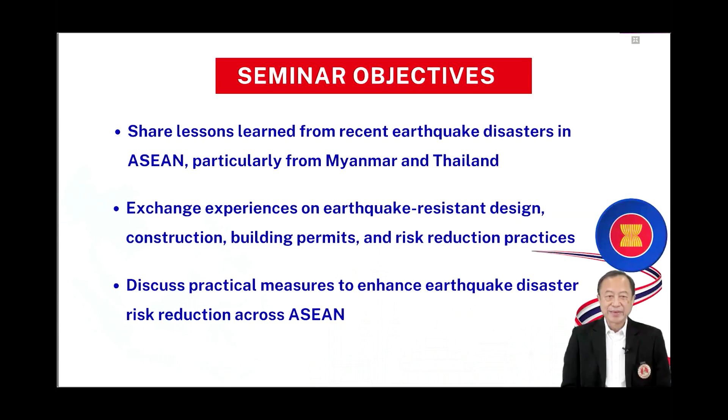Today we have the privilege of having the Deputy Governor of Bangkok Metropolitan share her experience on the recent earthquake disaster management. She was there from the first hour of the earthquake until the last day, and she saved a lot of lives. So thanks to the Deputy Governor of Bangkok Metropolitan.

Apart from that, we have the expert Dr. So from Myanmar to share experiences and information from Myanmar, and also two other experts from Indonesia to share their experiences in Indonesia. It's a pity that some experts from other countries like Japan could not come today.

And we also have one of the experts in Thailand to give us some facts about what happened in Bangkok in the past 3 months. So this is the objective of the forum today, and I hope that you who participate in this forum will benefit from the discussion, more or less.

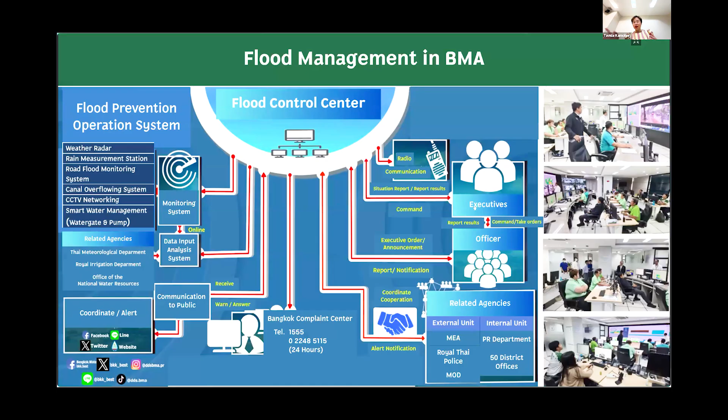I'm gonna keep talking. On that day, when we moved out of the building, this is what Bangkok actually did. We assembled our EOC and it's still going, it would be after the flood. Continue to the next slide. On that day when we heard the news of the building collapse, you have to...

This is what I don't know, what should I do in the next years to come or in the near future. I need to control a little bit more on social network, not to forbid them from posting anything, but I have to be the one sending out the news to compete with the news on social network. That's the other thing too.

When people don't trust, subconsciously you don't trust whether or not your building is strong enough, even if you already go down there and do stop, drop, take cover. Even if you know, as I studied from the professors, when the building shakes that much for that long, you can't do anything. People will run anyway. When people run, and the picture of these scenes is actually on the internet and social network, you can't help it. People are gonna actually move away from the building, even if the building has stopped. Even if the aftershocks that come afterward don't actually impact the shaking of the building, they're not gonna come back because of this picture.

No one is going to actually try to understand that Bangkok has about 6,000, 7,000, 10,000 buildings, and none of them collapsed, only one. No one is going to try to understand that we have about 210 construction sites, only one collapsed. Some of the cranes actually broke too, but that's fine. Anyway, I think we are somehow outrun by all the information that floods people, and that subconscious thinking of trusting the building or not.

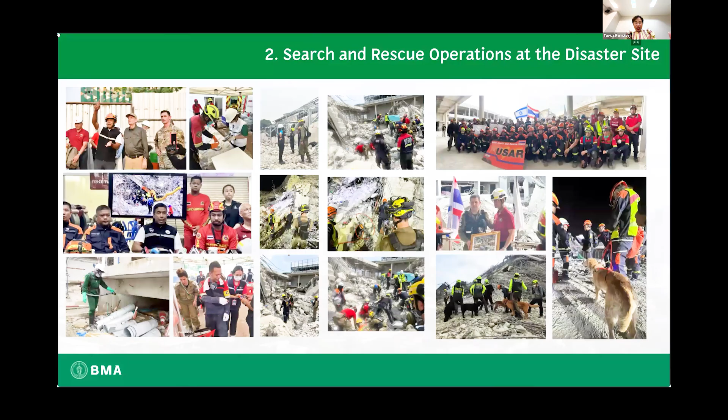We use this in a routine mode for public service and everyday problems. But this time we opened a new module, a building crack button. You can get in, take a picture of your room that has damage, or your building in your residential area, and send it to Fondue. We have volunteer engineers coming to our EOC to help look at the pictures to assess whether the damage is more or less, and communicate back to people whether their room is fine, their building is fine - a green tag.

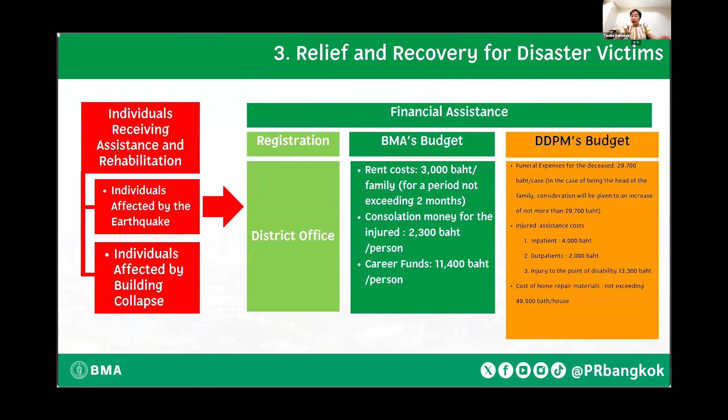Another number four regarding financial help — the other thing we ran into that is not quite easy at all is that the engineers might know best.

It's the compensation, the reimbursement that we're going to give to people. Right now, as I said, only through Fondue, 20,000 cases reported. But when we opened it as a district office to have an official report, 45,633 cases were reported.

Of these 45,000, most is usually minor and cosmetic damage. Nothing to worry about structural damage because the two buildings with structural damage have already been retrofitted and fixed. However, by law and regulations, we have to pay only for certain damage. Anything cosmetic, to make it a little more beautiful or go back to the previous condition, is not something the law allows us to pay for.

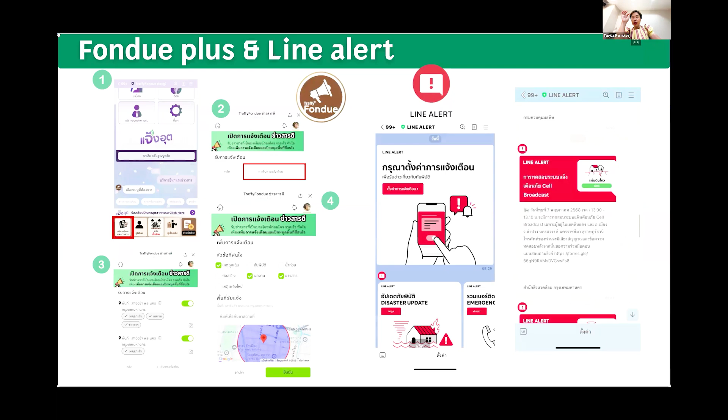On that day that I talked about the building, it would be the only building that I put a seismic monitor on. It's City Hall 2. We have 2 city halls in Bangkok. We put it there because our City Hall 2 has a height equal to 37 floors.

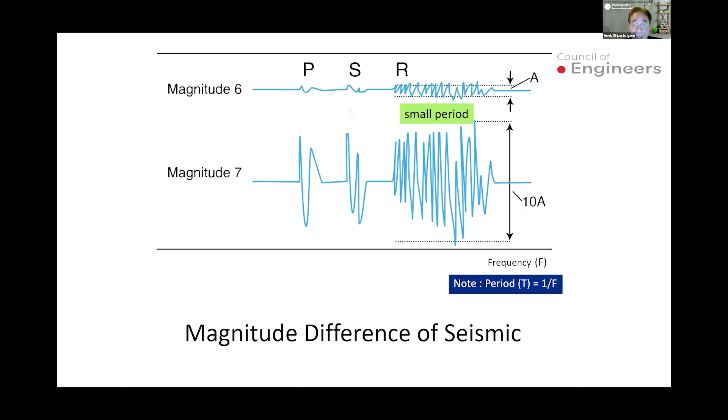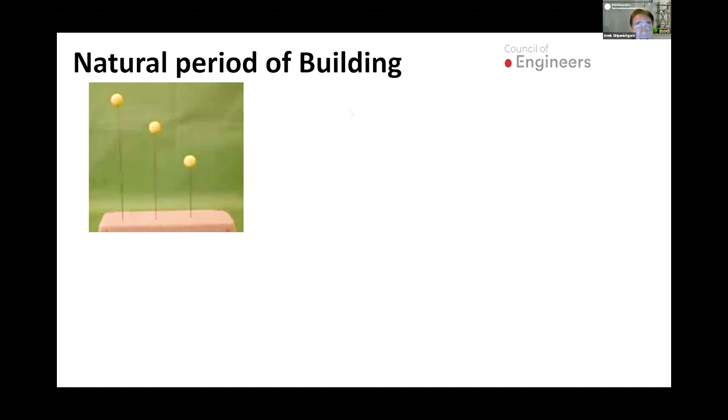As I said in the previous slide, near the active fault in the north part of Thailand, 2 or 3-story buildings may be affected by the earthquake. This is somewhat like resonance. If we look at small buildings, 1-story height, versus maybe 10-story height, the natural period is different, depending on the peak wave that occurs in the earthquake.

This is the earthquake report at Mexico City in 1985. The magnitude was 8.1, with the epicenter 350 kilometers from Mexico City. The damage report estimated 10,000 people killed, and property damage up to $5 billion. This was in 1985, and we studied it a lot, so in Bangkok we prepared the spectrum.

Now let me talk about our building regulation and standard. We began our regulation in 1997, when we had only 10 provinces or cities, starting from Kanchanaburi in the western part of Thailand up to the northern part. We got a new regulation in 2007, covering 22 provinces, and at that time we also had the standard, so we could design for earthquake resistance. This was the first one used in Thailand, estimated in 2009.

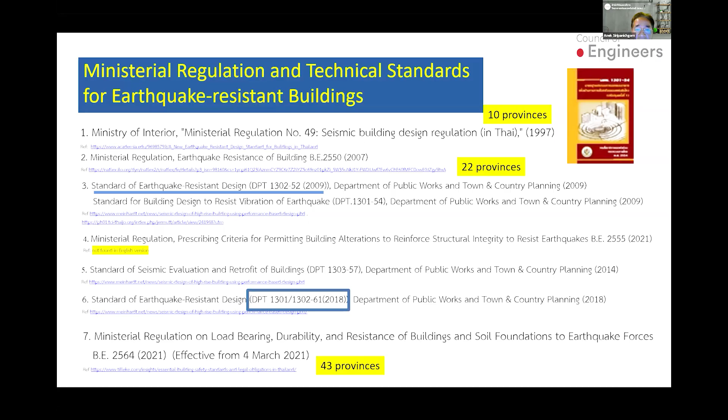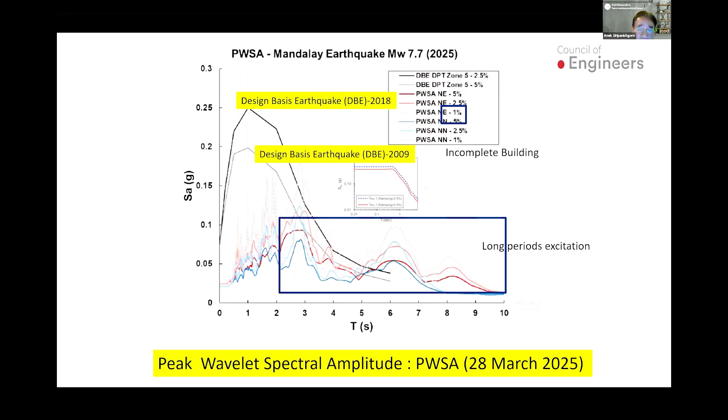After the investigation, when we submit the report, we will make a further study to improve our standard - the same as many countries, because the situation of excitation is very difficult and complicated. We accept that our spectrum acceleration provided in the standard may not be enough for long period excitation. This relates to the shape of buildings from low rise to medium to high rise.

I think this is a very key issue that we talk about. We can see the plan of the SAO building - this has a structural system with a core wall interfacing with the frame, and the floor is made by post-tension flat slab.

If you look for the center of rigidity, that means when we find the center of the stiffness of the building, it mostly depends on the core wall, compared to the center of mass, which is the center of the band. If these don't coincide, we will face a torsional effect.

Somehow, like this example, we can see different wall configurations in this span - in the western side we have a larger wall compared to the east, and the north is larger than the south.

So in this case, the center of rigidity and the center of mass do not coincide, so we will face a torsion effect. In the standard, this is called an irregularity. So the designer has to choose an alternative method - they cannot use the static one, they may have to use dynamic response. If the building is complete, we have to set up the CM and CR to coincide in the middle of the building - that's what we're talking about.

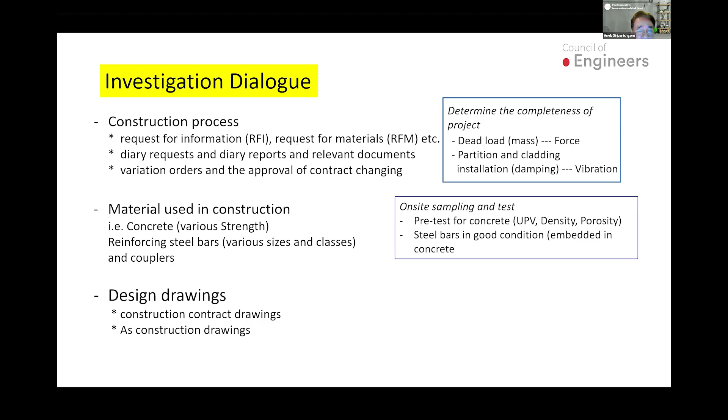Very importantly, we need to make sure the design of this building is okay or not. We divided into two groups - we have 6 universities in Thailand challenged to study this. We assigned 3 universities to run the construction contract drawing, using elastic and response spectrum analysis (RSA), which follows the 2009 standard.

The other 3 universities focused on the as-built construction drawing, considering that the thickness of the core wall was reduced from 30 to 25 centimeters, incomplete walls, and building cladding. This one was checked using nonlinear and modified response spectrum analysis, following the 2018 standard. So we ran our investigation through this dialogue.

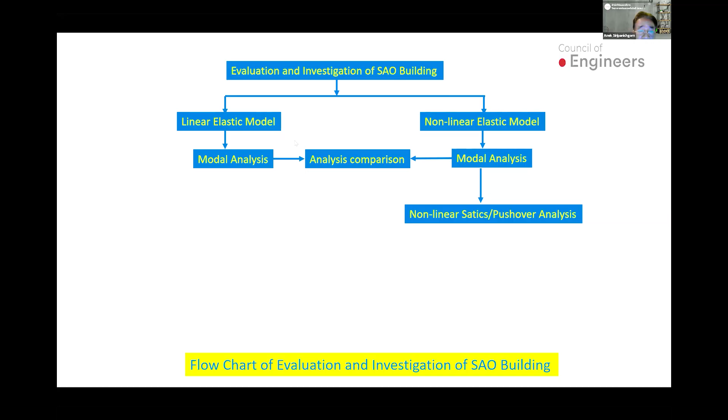So to conclude, our flowchart for evaluation and investigation of the SAO building consists of 3 universities running a linear elastic model, and the other 3 running a nonlinear elastic model. We check the modal analysis and compare results. Nonlinear is very complicated - I've told you that practicing professional structural engineers in Thailand rarely use nonlinear elastic analysis because it's very complicated. Now we have to check what happened to the building, so we're going to run through nonlinear static pushover analysis, which I'll detail after this. The modal analysis will analyze the model under real loads to find the natural period of the building.

For the nonlinear dynamic analysis, we use the time history, and when we check with the PWSA station, I showed you that this one will have the real PWSA data on the date of the incident. After that, we have to compare the analysis and the result of the SAO building. We have finished our investigation already.

For the nonlinear analysis, there are general steps involved in analyzing the building: project definition and data collection. We have the building geometry from the construction drawing and as-built drawing that we obtained from the office of construction. We also have the material property.

But in nonlinear analysis, we have to check the material property because it doesn't behave in the elastic behavior. We may be looking beyond the elastic range, so we have to check this in the model, and we use the properties specified for PWSA in the real case.

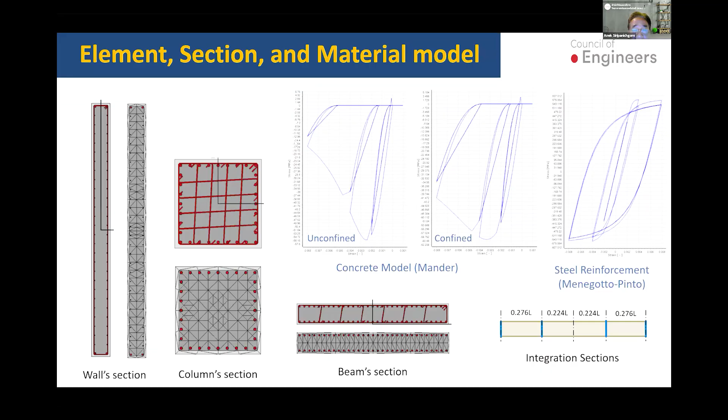This is the element, section, and material model. We use two researchers, very famous ones: Mander for the concrete construction and Menegotto-Pinto for the steel reinforcement. This is not the elastic model, because I think we get the true result when we come up with the nonlinear analysis.

For the structural model, we have 6 universities, so they use their own programs - sometimes like ETABS, SAP, SeismoStruct. We let them use their own software because we have to cross-check it.

For element modeling, we often model the beam and the column, which I'll show you after this slide. It's somewhat equivalent because we use the fiber method to check the shear wall.

This is very important because we can see that the collapse was somewhat like a pancake, a vertical collapse. It may have been caused by the shear wall collapse.

The mass and stiffness distribution is very, very important because we have a lot of mode shapes. We have to check what mode influences the behavior of this building's model, so the mass interpretation will be checked to show what is the most important mode shape.

Damping - I mentioned that 1% damping is also considered. And the loading, we have to use the gravity load, which is given by law and by the standard of our building code in Thailand.

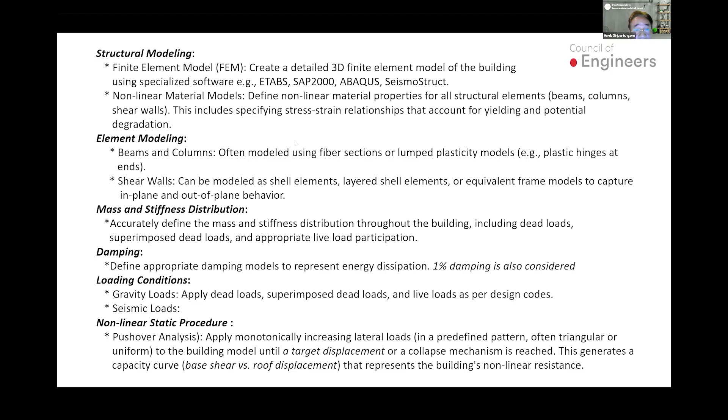So for the seismic load, we use the real data from 28 March. This is the building model.

I received this information from Professor Sutat. He is the leader of the University of Technology Thonburi team, and this is the parameter of the material that they used.

This is a discontinuity, and when we model it, we have to model it somewhat like an equivalent beam. We check it out like a rigid diaphragm for the frame, and the diaphragm is a horizontal subsystem. You can see there is a lot of core structure in this building.

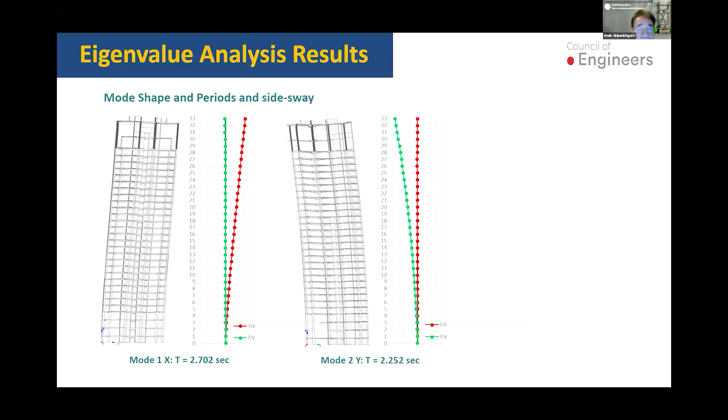This is the eigenvalue analysis we checked - first mode, second mode, and third mode. The first mode is sway and twist.

The second mode is only sway, and the third mode is twist only. This was checked from the eigenvalue analysis.

We compare the pushover results with the mode shape from the eigenvalue analysis. This comparison confirms what the major mode is that influences the behavior of the building.

You can see in the left table, this is mode 1, mode 2, and mode 3, up to mode 5 and 6. In the middle table is the effective modal mass percentage - you can see the modal mass percentage is very much concentrated in mode 1.

So this is the reason we consider very carefully the mode shape for the first mode shape, and this result helps us confirm and show what happened to this building.

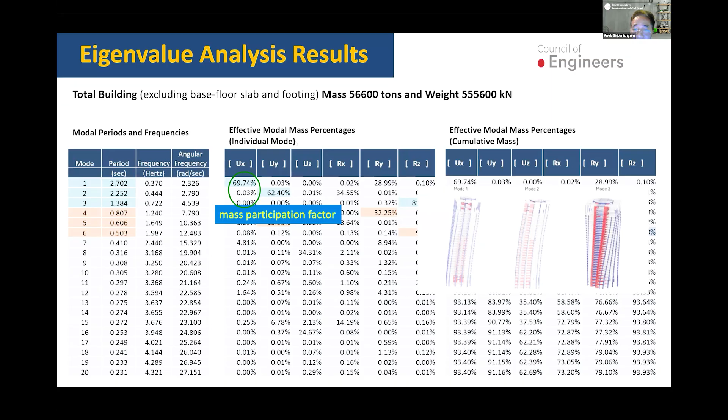So this is the mass participation factor that we use. As I mentioned, the first mode is sway and twist, the second mode is sway only, and the third mode is twisting under torsion.

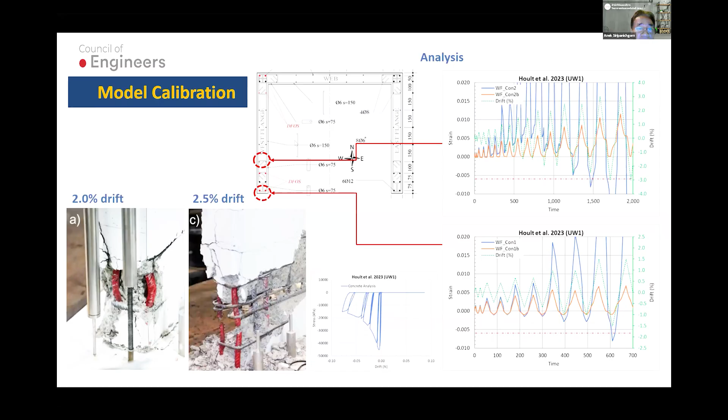So after we calibrate our model, we're going to run for the result. You can see from the figure of the building, the 3 columns. Maybe this diagram is from the first floor to 4th floor. So these 3 heights of the column are very slender. We should make our investigation into what happened first. Somehow this slender column maybe buckled before the total collapse of the building.

So we have to check with the recent research, we have to check the strain of the reinforcement that we use from our model results. For the performance, we check the displacement, we check the plastic hinge formation, and the very important one is we check the demand per capacity ratio that should not be greater than 1. And the base shear and overturning moment we check on every parameter to ensure our model is suitable to investigate.

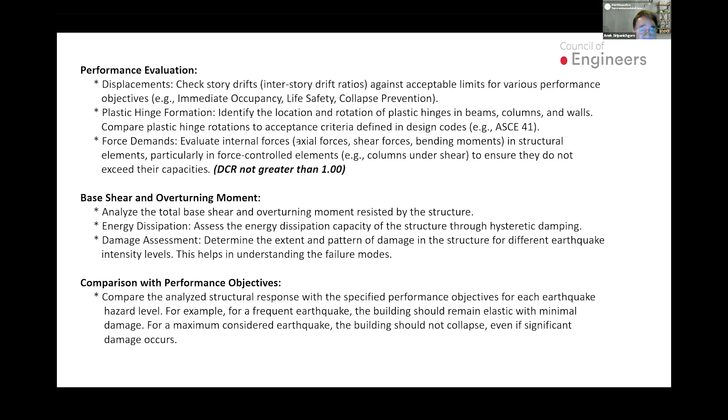This is a comparison of the performance objective. We put the nonlinear static pushover analysis, from north-south and east-west in the vertical and horizontal respectively. The model uses the load, and we target the maximum target displacement at 1 meter on the top of the building.

We check the strain, we check the force, every type of force somehow like bending, where bending will induce vertical compression and tension in the core wall, and we check for the shear. But it's very difficult because maybe on the program, somehow like ETABS, the model is unable to simulate shear deformation, right? They're looking for bending. Maybe bending is a measure for that computer model.

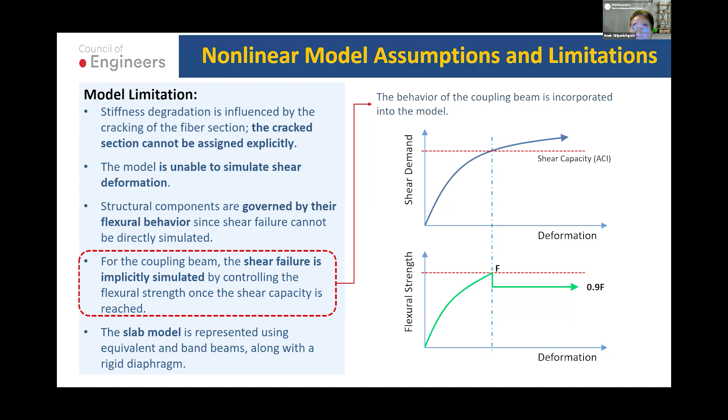We can see that from the NSPA, we got the roof displacement approximately 23 centimeters, and we get this into our calculation after that.

This is the pushover result in the east-west direction. We have seen some defects that occur maybe in each core wall. We have a lot of core walls, and after that we're going to push it, somehow like you can see from the graph that we're looking for the yield, the wall yield, or the beam shear, or the wall crush, or the yielding of the reinforcement. So we put this one, the target is 1 meter.

And this shows the wall shear DC ratio, DCR, right? 23 centimeter displacement in the south-north direction, and laterally on the plan of the building. So we can detect some DCR greater than 1, approximately at floor 3 or 4 somehow.

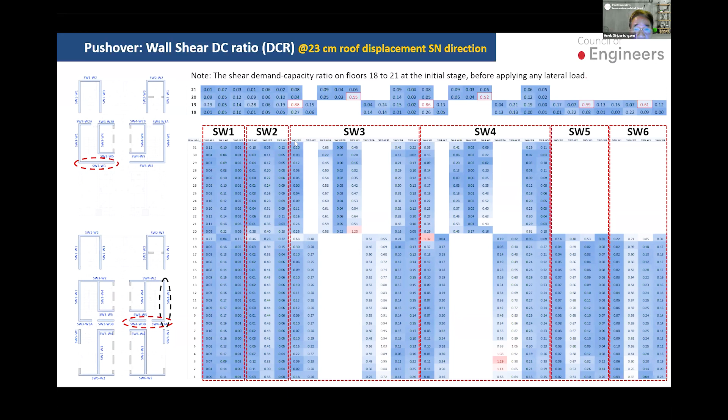Then we can find the DCR that's greater than 1, and we also check the strain, right? The strain will occur especially in concrete. The magic number is 0.003, greater than that we will find the crushing of the concrete. So the wall strain, especially in the core, we have to check it.

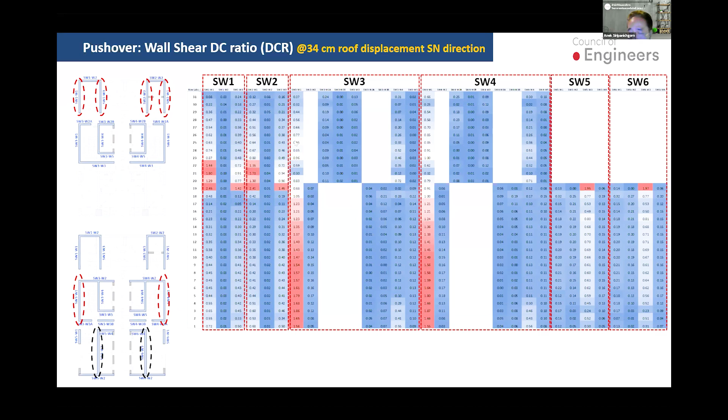And this is from the landing of the NSPA. So we try to push more than that, at 34 centimeters roof displacement. You can see that we have a lot of DCR greater than 1, and this shows the weaker point, the weaker floor that begins the total collapse. We also check the strain in the reinforcing bar, right? Some strain is greater than yield strain, and we also check this at the ground to the second floor. This is the result we get from the investigation.

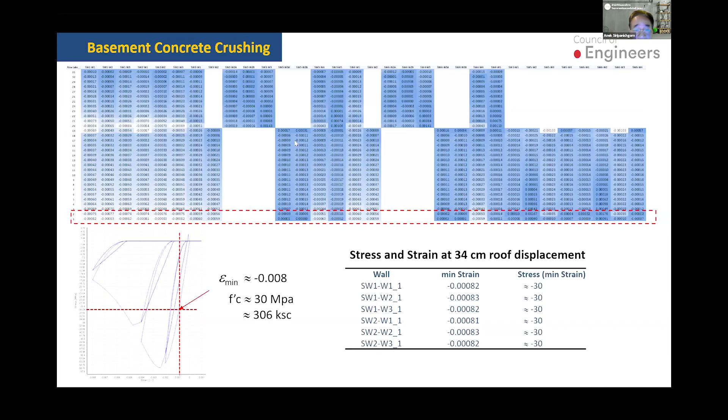So the magic number, you can see that the strain minimum is 0.008, right? This is maybe for the f'c about 30 megapascal. So this is the one we have to look after, because we expect that the failure is coming from the crushing of the concrete in the wall, and we will review many research papers to see what is the basement concrete crushing or not.

But we found in our investigation that it's not coming from the footing or the piling of the building. And this is the one we use to explain the difference in strain we're looking for. This is a ratio of shear force to shear strength of the RC wall.

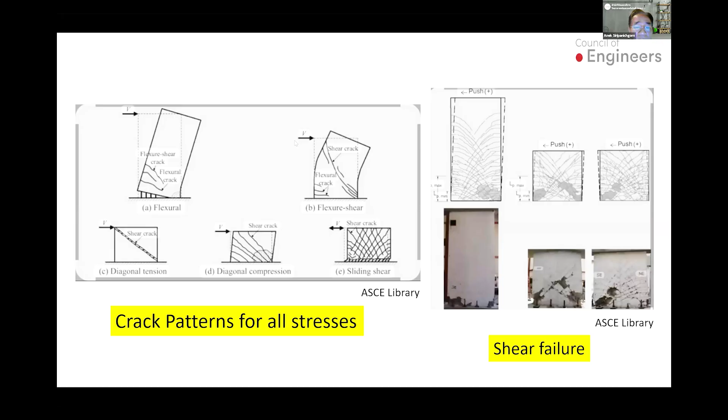However, when looking at the forensic engineering, we have to look for the evidence that occurred on that day. We have the preliminary data from the video recordings. We have 10 clips from different sources. This is very important, because we have to check from the 10 clips.

We have to determine what is the trigger and where the trigger occurs in our collapse timeline. So the video clips will be manually synchronized by visual cue, and the result will show the incident timeline.

You can see that we have 10 clips, renamed 001 to 010. The frame rate is 30 frames per second, so our investigating committee is looking very carefully at each second. We have 30 frames, very small intervals, because this is very important.

And the frames, we can see we have 10 videos of the building. This comes from people who took the video recording themselves. We have 10 clips, so our duty was to synchronize them to the same time.

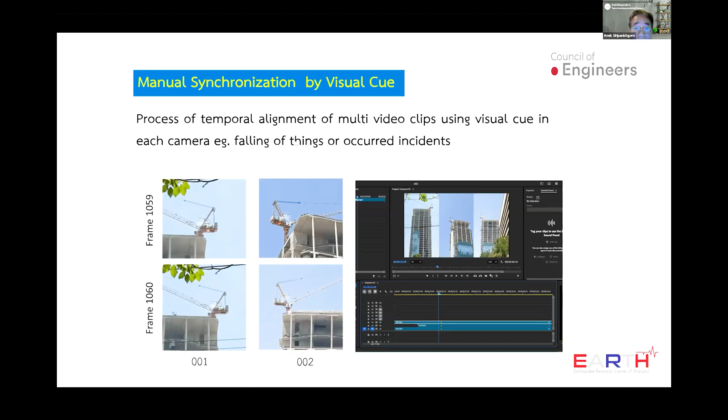So first we checked camera number 1 against another one, and we can check everything. The checking is something like watching the video to see if at that time something was falling from the upper floor, something like cladding or the preventing plastic covering the building changing shape or deforming. So we can make the synchronization from this.

So the first step is synchronizing clips 1, 2, and 3, because the file names and the time they were taking the video are very close. After that we synchronize all 10 clips, so we can effectively have only one camera capturing the whole building.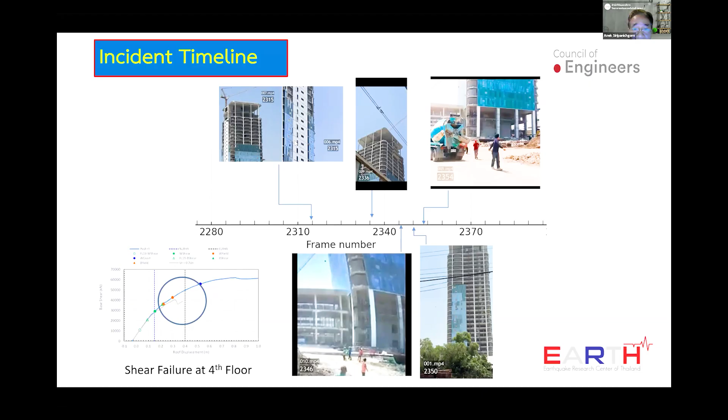So I think the ticker is on the 4th floor, and we checked the shear failure at the 4th floor is the same. When the failure occurred at that floor, at that core wall, it could not push over anymore, which ended up with a loop displacement, and we had a lot of consequent failures that occurred. This is the story from our investigation.

In the last part of my presentation, I think I have to show you our iconic building in Bangkok. This is the outrigger and belt truss system, which is very suitable for a large center core, and we have to reduce the sway of the building, especially from wind action.

So the way to reduce the sway of the building is to put a cap truss or ticker members, fixed and assembled with the auxiliary columns. If you have wind load from the left, the auxiliary columns will create a couple that induces compression and tension. This couple helps to reduce the sway of the building.

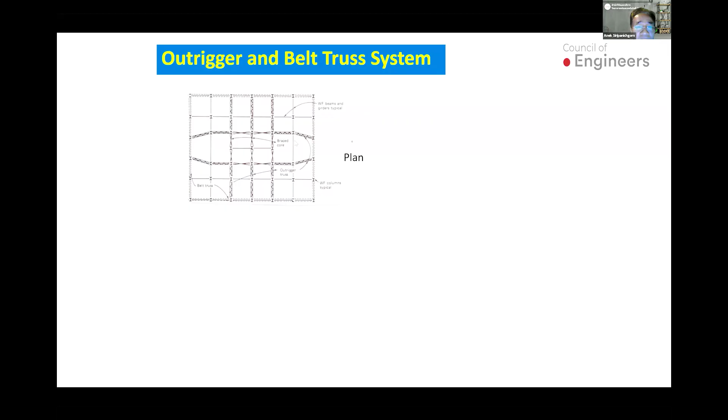And this is the behavior of the outrigger belt truss. This is our building. We have 2 buildings in Bangkok, and the outrigger should communicate with the belt truss to ensure that all the exterior or perimeter columns act like the ones we take from the central core. This shows the structural system of outriggers and belt truss.

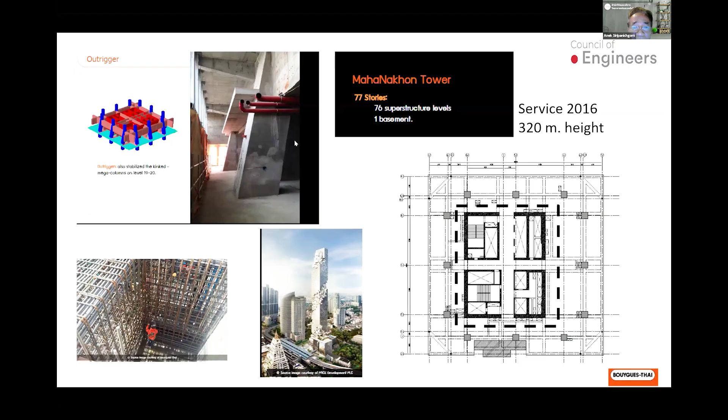In Bangkok we have a modern tower called Mahanakhon Tower, approximately 320 meters height, serviced in 2016. This building is 77 stories height. They have a large core wall, so it behaves somehow like a bending mode, and there are no columns within the core wall and the perimeter column, so they try to use outrigger and belt truss. However, this one is made from reinforced concrete, so the beam is very deep with very much capacity, a very thick RC, and they use the RC wall to be a belt truss.

The last structural system I show you is the tube structure. This is how to make a structure give the largest moment of inertia. They form the structure with closely spaced columns connected with deep spandrel beams, so this one is somehow like making a tube structure.

We know that the Empire State Building in 1931 is very famous, maybe the most famous tall building in the world. They use frame and wall, somehow like a shear wall, working like a frame, like column, slab, and core wall.

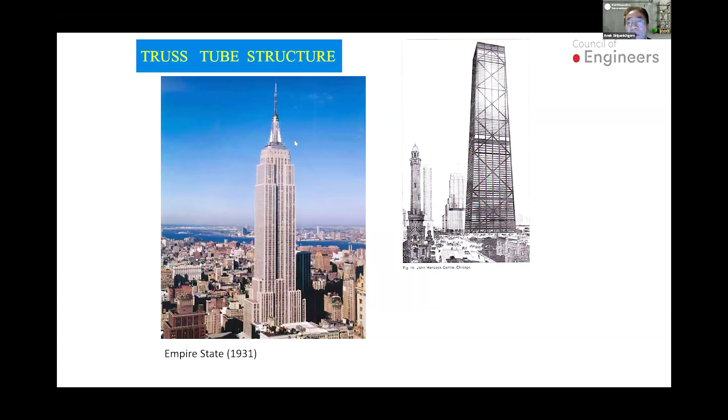Another very famous building is the John Hancock building in Chicago, serviced approximately in 1976. They use the tube also, but the column spacing is not closely spaced. They use wide spacing of columns, so they have to put the truss tube. This shows that the structural system of the building can reduce the price of the building compared to Empire State. They use maybe only 55 or 60% of the steel that was used in Empire State.

We have one like this in Bangkok, called the Baiyoke Tower. It was maybe the highest building at that time, serviced in 1997, 304 meters. You can see from the section of this tower the diagonal truss tube. So this makes an inner tube and truss tube.

So this one is very strong, and this is the answer to why our tall buildings can be very strong compared to the previous seismic events in this time. Maybe I come to the end of my presentation, and I have to say thank you for your kind attention.

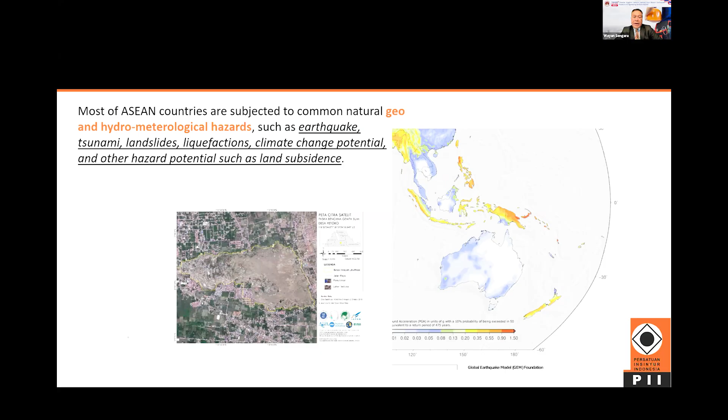In ASEAN, we are on a similar or the same tectonic setting, where most of our ASEAN countries are subject to this subduction source. Many ASEAN countries, particularly Indonesia, Thailand, Myanmar, and some other parts, are affected by this seismic source. As you can see here, I don't want to scare you.

Indonesia has experienced many earthquake disasters over the last 30 years, and many highlighted in orange are the large ones with magnitude higher than 8. It also caused collateral tsunamis, and the last one, the Palu earthquake in 2018, caused liquefaction - maybe the largest liquefaction occurrence this century. And of course, in 2004 we had a very large 9.2 earthquake.

This is typical damage or collapse of many buildings in Indonesia. Even though some buildings remain intact under the earthquake, many of our buildings have experienced various levels of damage.

What is our framework for disaster risk reduction in the future? We have an ASEAN vision for disaster risk reduction 2025 that identifies some perceived items, like building capacity, regulatory arrangements, and preparedness strategies that we need to implement in the future. We also need to enhance disaster management and emergency response due to this hazard.

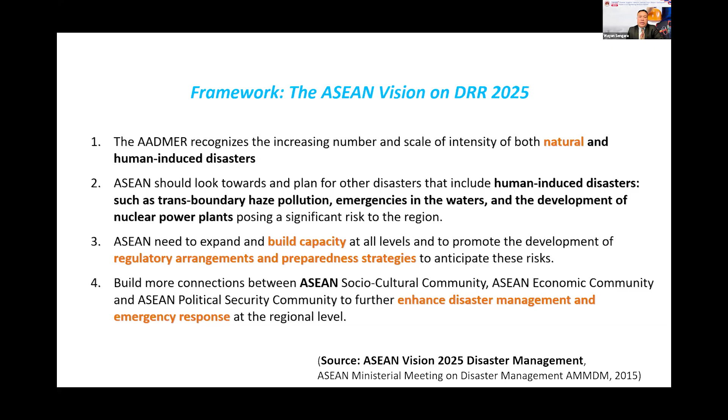Indonesia's state of progress in earthquake disaster risk reduction includes the master plan for disaster management from 2020 to 2045, our presidential decree from 2020, managed by our emergency response agency. The second is the 2017 and 2024 update of Indonesian earthquake source and hazard maps. Also in 2019, we have a new revision of the Indonesian seismic resistant structure code for buildings and non-buildings, updating the 2012 version.

This process followed the 2004 Aceh earthquake, after which we committed to revise and update our seismic hazard map and building codes. One response to this is the seismic hazard and risk targeted ground motion effort - we wanted to update our code to follow or refer to international building codes, particularly ASCE, the American Society of Civil Engineers. For this, we referred to ASCE 7-2016.

This resulted in the 2019 risk targeted ground motion map, an important input to the building codes and to compliance enforcement of the building code process and capacity. I'd like to share this as our framework - the part highlighted in red relates to us as engineers, as professional engineers, needing to be aware that the seismic building code, its dissemination and training, building design, building code compliance for permits and construction supervision, is a key element to reduce earthquake disaster.

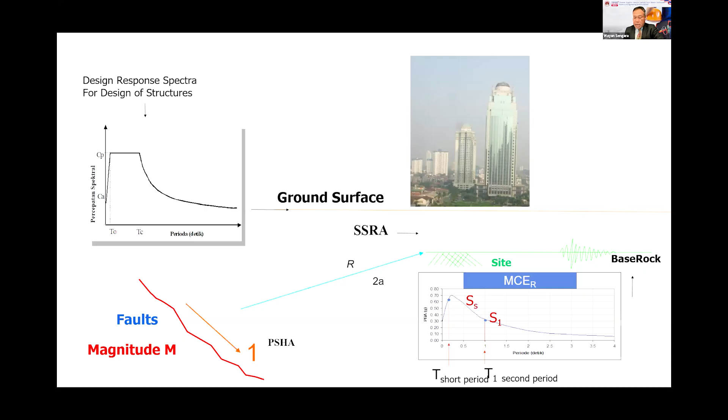So we need to specify what is, let's say, the PGA, what is the spectral acceleration at the base rock, and then we have a site classification to be properly classified, so that our spectra for each specific site is identified properly. So this is the process.

This is the evolution of our seismic building codes from 1978, then 1992, and then also to 2017. So from 1978 to 2017 we have a relatively significant update on this.

And this is the update of the Indonesian hazard map, and actually in 2024 we also have the new map which is not currently included or input into the new building code, but we have the hazard map already. And this hazard map is not only for building but also for bridge structure and also dam structure.

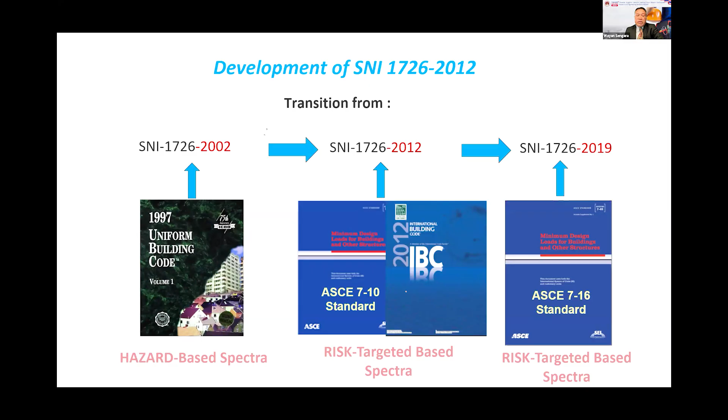So the development of the Indonesian seismic building code is actually referring to, in 2002 we have UBC, and then 2012 we use ASCE 7-10, and then finally for 2019 we refer to the ASCE 7-16 standard, which actually become the international building codes.

In addition to this, we release a new Indonesian seismic building code, and also the requirement on the earthquake ground motion selection and modification for building.

So just now we heard Professor Anek present how we do a nonlinear response history analysis for important buildings, a high-rise building, and this is also in practice currently in Indonesia. I think later on Professor Iswandi, Imran, will go into more detail on this, but the ground motion guideline is already available and now is adopted for practice in Indonesia.

How about the compliance and enforcement of building? We have an advisory committee establishment and review process, currently modified as a professional engineering expert to review the design. And this is by the decree of the local government to have the building permit properly evaluated.

So just to highlight how the professional engineer need to have a certificate and well, actually need to have a license to design, and the advisory team or the expert need to evaluate for the permit. This is the engineering capacity building.

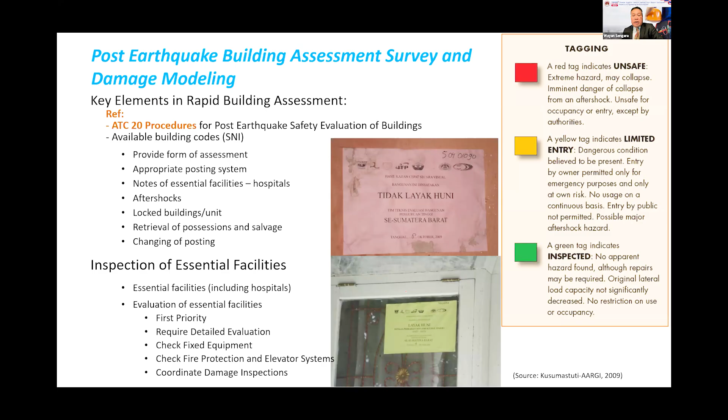So in this we have this experience. Many of the post-earthquake buildings we tag red, yellow, and green. During the 2009 West Sumatra earthquake, we had a more systematic post-earthquake survey in more detail compared to the rapid building assessment, with a total of almost 4,000 buildings surveyed in this area.

It comprised many building construction types, medical facilities, educational buildings, commercial, and residential structures with various types and construction. The survey work entailed 1,700 interviews with residents, and buildings of all ages were damaged, with nominally engineered structures also suffering significant damage. The observation revealed that poor structural configuration, poor detailing of reinforcement, and use of low quality construction material were some of the contributors to this damage.

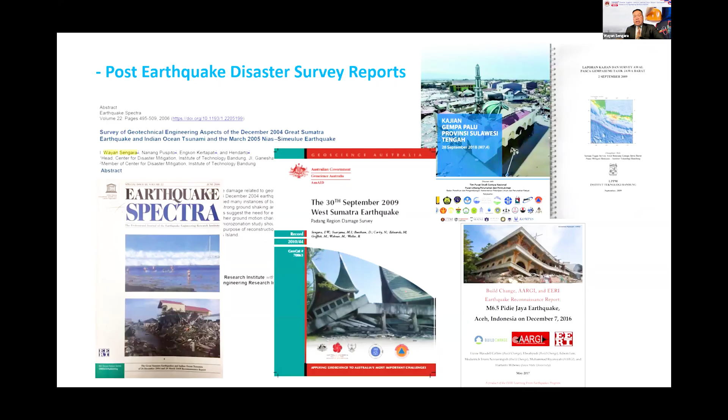School safety - this is my last thing to share - includes training, and also training for masons. Our schools need to be protected to make sure that our children, our future generation, are safe under earthquake in the future. We have conducted this in several provinces in Indonesia, even though this activity is not too aggressive.

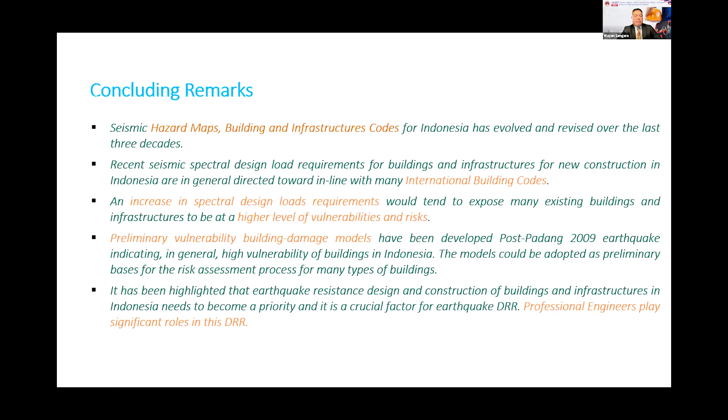So now we identify the risk of building damage, and this is good for disaster management agencies, and also important for insurance to identify the risk. So it has been highlighted that earthquake-resistant design and construction of buildings and infrastructure in Indonesia needs to become a priority, and this is a crucial factor for earthquake DRR. Professional engineers play significant roles in this DRR, and it is essential to prevent and minimize building and infrastructure collapse or damage from future earthquakes.

Through all of this, I think I already mentioned the provision of full engineering design parameters - this afternoon we also heard from the deputy governor that we as engineers have a lot of roles in this, and we need to put proper design parameters for our buildings.

So the improvement of building hazard and building code. We need to also legally put these building codes in the local regulation. Proper design, good quality construction, and also design enforcement for the building permit, systematic and good construction supervision.

The disaster management agency needs to have disaster risk assessment for the building and infrastructure. This demands development of continuous enhancement of building and infrastructure vulnerability models. Retrofit of school, essential and vulnerable buildings.

I think we learned a lot from Taiwan. Most of the school buildings in Taiwan have been retrofitted. So in Indonesia, we have a lot of concern on school buildings.

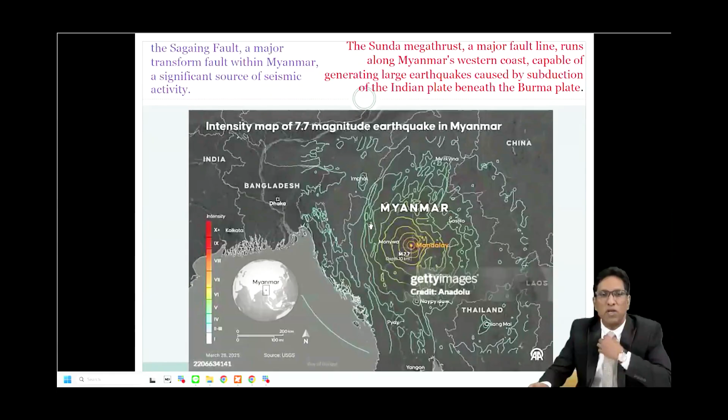So when we study Myanmar, this was the recent 7.7 earthquake, called Sagaing, affecting Yunnan, Thailand, Bangkok, and Ho Chi Minh City afterward. When we look at Myanmar, we have two major earthquake sources. One is the Sagaing Fault, running along the center of Myanmar. Another is the Sunda Megathrust, along the west coast, which is also very severe. When it happens, it's around magnitude 7.7, 7.8. So Myanmar has two very serious earthquake sources.

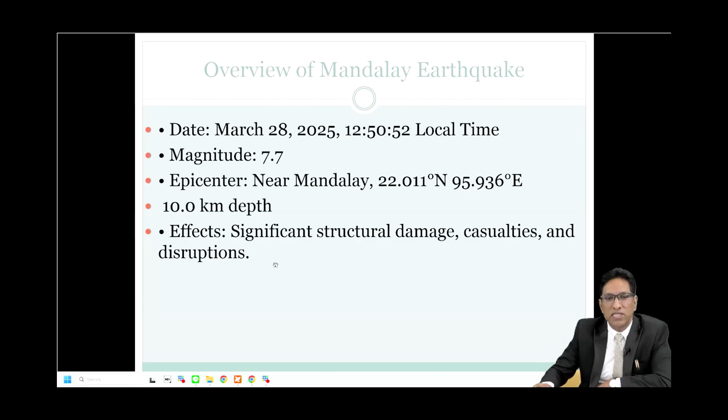So let's overview the Myanmar earthquake on March 28, 2025. Magnitude was 7.7, epicenter near Mandalay, to the northeast, with a depth of 10 kilometers. The effect was significant structural damage, casualties, and disruption. Looking at the moment magnitude, the seismic movement corresponds to a 7.7 magnitude earthquake.

When we see the earthquake-related severe damage, we come to pay attention to detailing. Earthquake-related detailing refers to construction practices that improve seismic resilience. This is essential for our region, because such detailing can prevent catastrophic failure of buildings during an earthquake.

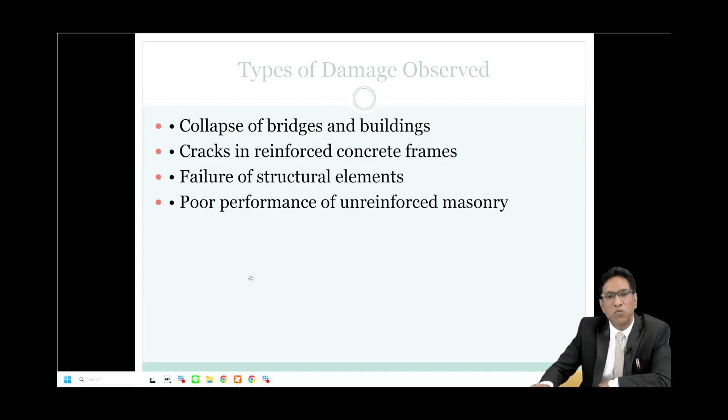So how severe is the lateral force of the earthquake? We can see it was very severe when the earthquake hit. To cope with this lateral force, we need very precise earthquake detailing in construction. The root causes of the damage are inadequate detailing in construction, lack of ductile reinforcement, poor quality control, ignoring code provisions, and informal construction practices. These five items, in my view, are the root causes of the damage during the Mandalay earthquake.

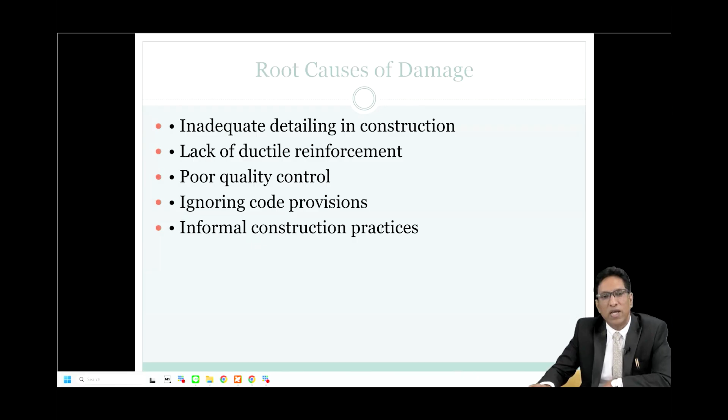Looking at some pictures, we can see why this happened - column shear failure. Improper confinement of longitudinal bars led to shear failure of columns during the earthquake. We need very good confinement in the detailing so that we can prevent this kind of damage.

Second is the open ground story problem. The upper stories have brick walls and are stiffer, but the ground floor is less stiff, so the column fails because of poor energy dissipation capacity.

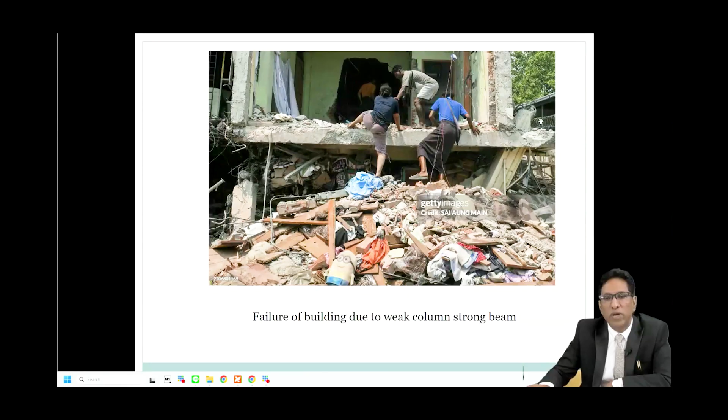Another case we studied shows weak column, strong beam - the beam is still okay, but the column has already failed. In my opinion, this is because of the captive effect due to architectural requirements, causing the column to be unable to withstand the force. In the steel frame case, it's because lateral force causes warping torsion, so we need good stiffeners in the steel structure.

Coming back to what earthquake-related detailing means: we need to consider ductile design, proper stirrup spacing, beam-column joint reinforcement, confinement reinforcement in columns, ensuring energy dissipation during a quake, and the captive effect due to architectural requirements. All these six items have to be considered for the ductility of the structure.

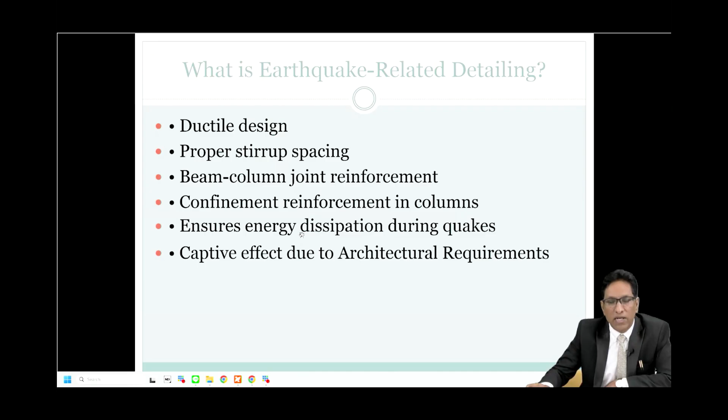When we look at lateral force versus gravity: under gravity, our beam behaves with positive and negative moments like this. Once seismic lateral force comes in, the behavior changes, shifting right side and left side. When we see the resulting moment, it becomes like this, so we need to treat the end conditions. The end condition has to have very good ductility to withstand the seismic force.

When we look at the column, as lateral force comes in, the moment behavior is like this, so the splice region is located somewhere here. This area becomes the plastic hinge area, so there is no splice in this area.

Okay, we go to study all the detailing of the reinforced concrete. This all is from our teacher.

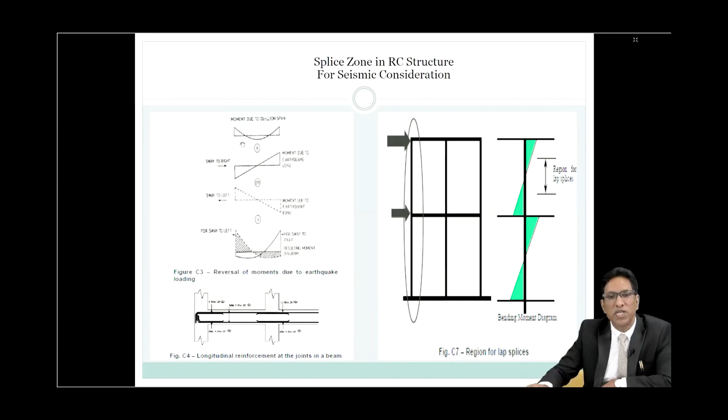So when we study the ordinary moment resistant frame, this is for gravity. There is no plastic hinge, so we can have the lap splices not in this region, not in this region, not in this region. This is the concept of the ordinary moment resistant frame. So if you want to lap splice, it must be outside this area. If you want to lap splice in the center, at positive moment, you cannot do the lap splices there.

So for the beam, the same concept applies as well. For the column, the lap splices you can do after the slab. After the slab, you can do the lap splices in that region.

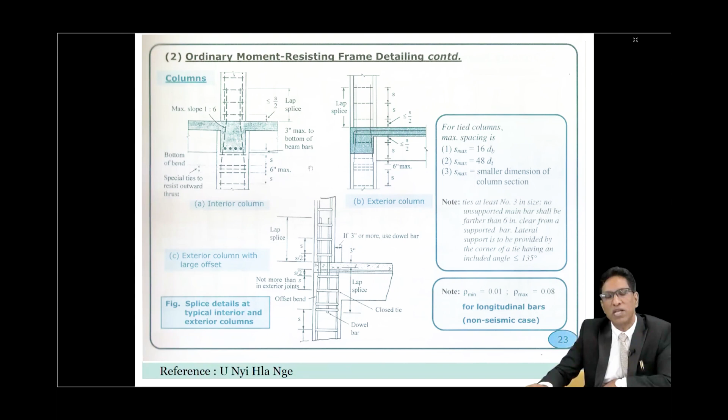And then the stirrup spacing also, according to the code requirement, is 16 diameter of bar or the smallest dimension of the column section, C1 or C2. So normally the smallest dimension governs. This is how to do the confinement for the column.

But for ordinary moment resistant frame, the hook is still 90 degrees. Then we go back to the intermediate moment resistant frame detailing.

So when intermediate comes in, the definition of the plastic hinge region comes into consideration. The code defines a 2H area, where 2H is the plastic hinge area. In this plastic hinge area, there can be no lap splices.

And then the spacing of the stirrup. The stirrup spacing is 8 times the smallest bar diameter, divided by 4, or 12 inches for the intermediate.

When we look at the column for the intermediate frame, there is also a plastic hinge area. This area is defined by the larger of C1, C2, or the clear height divided by 6, or 18 inches. In this area, no lap splices are allowed for the intermediate moment resistant frame, and the hook becomes the 135 degree seismic hook.

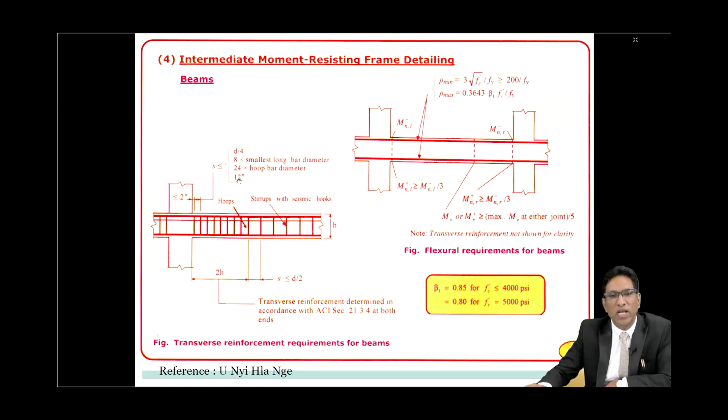So for the special moment resistant frame column, the plastic hinge area is the same — larger of C1 or C2, or clear height divided by 6, or 18 inches — but the spacing is different already. Spacing is C1 or C2 divided by 4, 0.25, a very small spacing we have to use for the special moment resistant frame. The stirrup spacing becomes lesser compared with the intermediate moment resistant frame.

It is 0.5 of C1, C2 for intermediate — C1 or C2 divided by 2 — but for special moment resistant frame, C1 or C2 divided by 4, 0.25, because it requires more confinement, more arrangement of confinement for the special moment resistant frame.

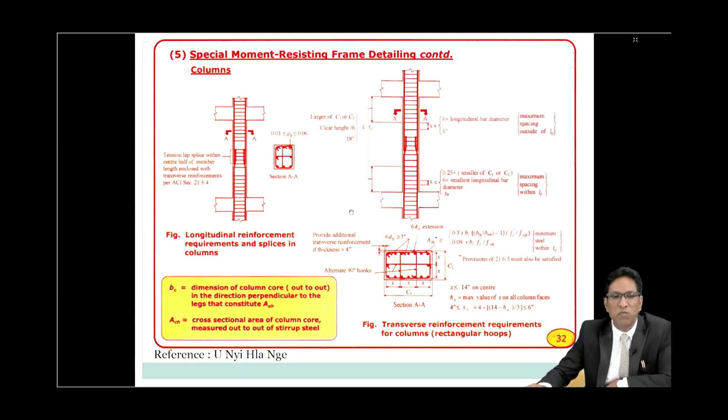For the RC structure, we advise following MNBC, ACI, and Eurocode. MNBC is Myanmar National Building Code. ACI and Eurocode standards cover proper anchorage and lap splices, as mentioned before, shear detailing and confinement detailing to improve ductility and resilience, and proper management for the captive effect.

If you follow all these things, I think you can resist the earthquake lateral force in some instances. So for RC structure ductile design, I recommend the IS 13920 code and commentary, because it comes from a World Bank project, and through experiments they defined things better.

In the IS code, the response reduction factor changes. In gravity design we use 3, but in ductile design we use 5. So increasing the response reduction factor helps minimize the risk of earthquake damage.

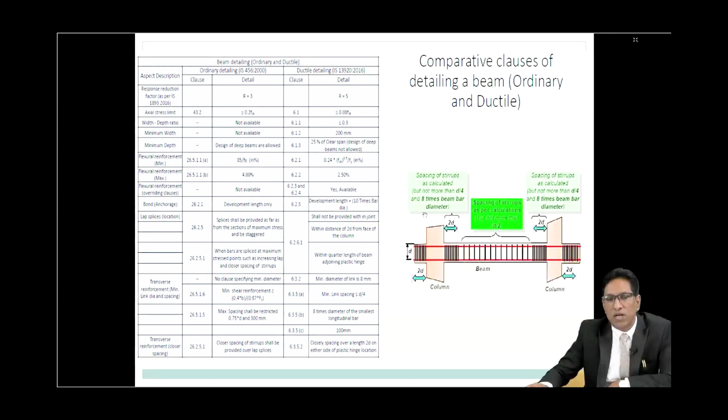Another interesting point is the minimum width. Ordinary design doesn't define it, but ductile design requires a minimum of 200 millimeters for the beam, and stirrup spacing as I mentioned already. So what we learn is that the minimum dimension of the element is defined. For the column, the response reduction factor is the same, but the minimum dimension becomes 300 millimeters. This is the ductile design requirement.

So we go to the next section. Up to now, what I presented is all about RC structure. Now we go to the steel structure. Once we talk about steel structure, we have to follow the AISC seismic provision.

When we talk about detailing of the steel structure, we cannot look only at connections. Connection is actually less important in the steel structure. More important are the material requirement, member and connection requirement, and structure requirement. All three together make the steel structure ductile.

When we talk about stability, we have 3 equilibriums: stable equilibrium, unstable equilibrium, and neutral equilibrium. When the load capacity reaches stiffness zero, it becomes neutral equilibrium. When stiffness goes negative, it becomes unstable equilibrium and structural stability failure. To protect against this, we need ductile design of the steel structure.

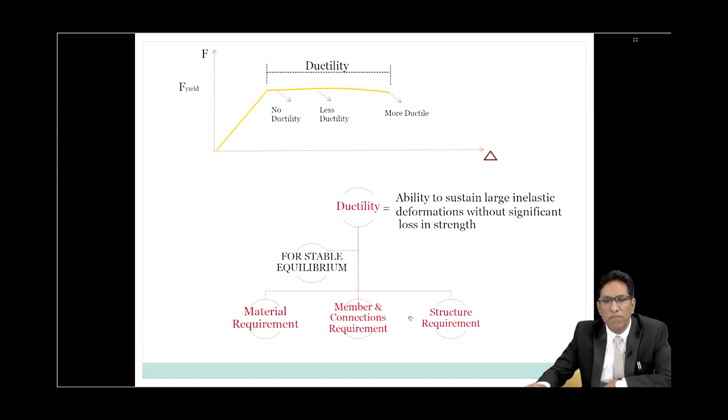I recommend AISC, this is the 2024 update. Going to material: the AISC recommendation is to limit maximum yield stress to 50 KSI. Why this limitation? When steel material is high strength, it has less ductility. Therefore we have to use A36; A572 is better than A36. This is the AISC limitation—we have to use yield strength not more than 50 KSI.

Then we use expected yield strength Fy, not the minimum Fy from the test, because factory manufacturers produce more strength than the defined minimum yield strength. That's why we multiply with the true strength factor, A36 with 1.3.

When material is finished, we go to member requirement. For ductile design of the structure, we have to use the compact section, not the slender section. A compact section is controlled by the width-to-thickness ratio, b by t ratio. We have to use a low b by t ratio and adequate lateral bracing.

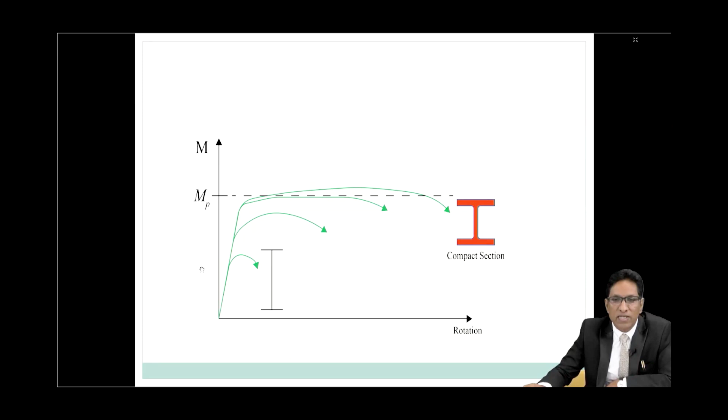The compact section can resist more movement than the slender member. Looking at this curve, the width-thickness ratio b by t: when it's low, it's more ductile. When we see moment capacity, a low b by t ratio has more plastic moment capacity. So we have to select the member in this region to get ductility of the element member.

In structure requirement, we have 3 moment frames. The ordinary moment frame joint design uses an overstrength factor of 1.1, so it can resist small earthquakes as well. For the medium ductility class, we use the intermediate moment resisting frame, with joint design at 0.02 radian minimum.

But this is the minimum, so maybe you can do 0.025 as well. For the high ductility class, we have to use 0.04 radian rotation for the joint. This is all the requirement of ductility of the structure.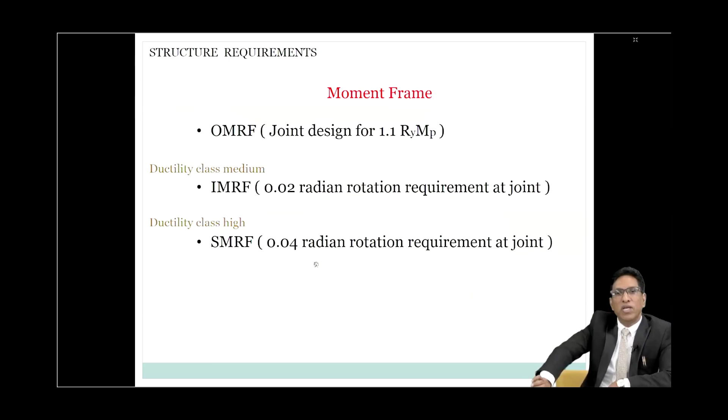For example, driven precast pile, the pile has to intrude into the footing around 150 millimeters, which is best for the fixed connection. Some people keep it at 75 millimeters, but 150 millimeters gives a complete fixed connection for ductility. Then rebar has to go minimum 2D length inside the footing to get the fixed connection for ductility.

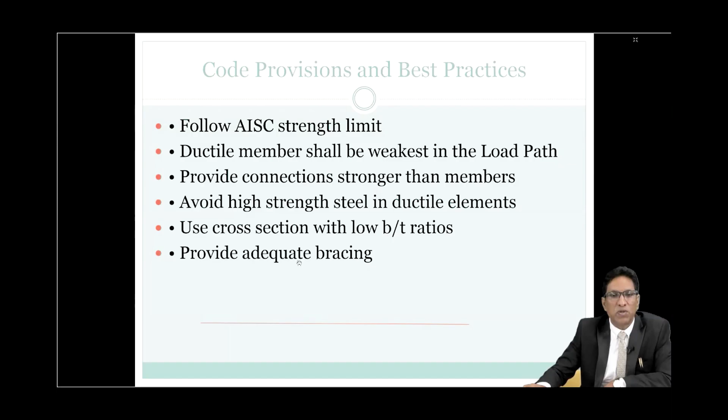So if you want a fixed connection for the foundation with the structure, please pay attention to those requirements. For the steel structure, I advise following AISC strength limit. Ductile member shall be weakest in the load path. So if in the load path you put a non-ductile member, then you have a structure problem. Provide connection stronger than the member. Avoid high strength steel in ductile elements. Use cross-sections with low width-to-thickness ratio. Provide adequate bracing.

So what we learn from Mandalay: we see a lot of damage in Mandalay after the earthquake. So the lesson we get is we need to follow code compliance. We need to follow the code, need skilled professionals, and we need to check during construction whether the design requirements are properly in place or not.

Another one is retrofitting and maintenance. So we have to study the existing building, whether it needs retrofitting or not. You have to check regularly. Risk of informal construction - this one we studied a lot in Mandalay, informal construction practice in Mandalay.

So my recommendation is to enforce seismic design code for the construction industry. Train foreman, engineer, architect, and worker about the importance of ductility and detailing. Retrofit vulnerable structures, and conduct public awareness campaigns.

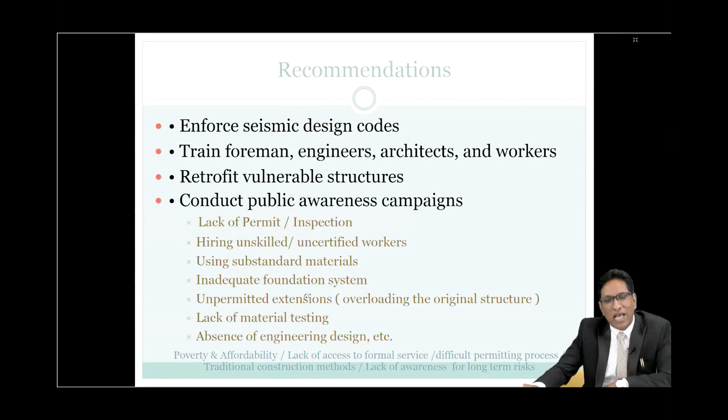So in conclusion, earthquake detailing is critical for safety. Mandalay's earthquake highlights the need for some correction. Structure safety equals ductile design plus detailing plus supervision plus enforcement. If you do all of this, you get structure safety.

So for the ASEAN matter, for cross-border engineering service among ASEAN countries, we need an ASEAN occupational standard for construction, like one standard for all ASEAN countries. Which code are we going to apply? That we have to discuss further for this matter.

And for localized practices, awareness training on construction compliance is needed for the foreign worker and foremen. Once we cross the border and reach those country's people, we have to do awareness training courses for all foreign workers and foremen, so as to ensure their safety.

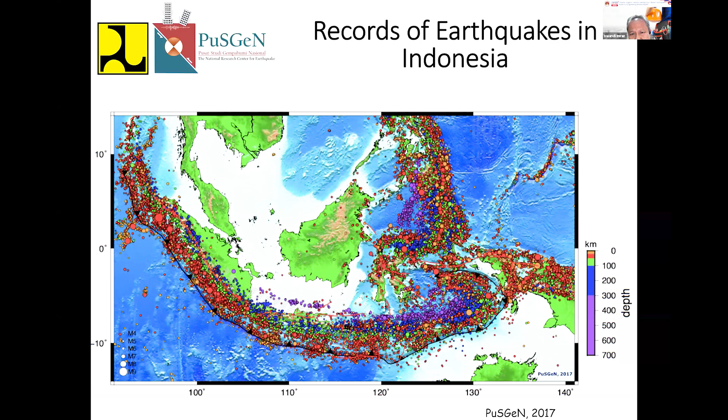To reduce earthquake disaster, some mitigation strategies have already been developed in our country. These are just some of the list. Some of these have already been mentioned by Professor Sengara, so I'll only touch on some or add ones that haven't been mentioned. The first one is conducting reconnaissance studies to obtain lessons learned from every seismic event. Professor Sengara mentioned this also. We frequently, every time after an earthquake, form a team to study the area, to study the damage, to get lessons learned from what happened there. The last report we produced is from 2022.

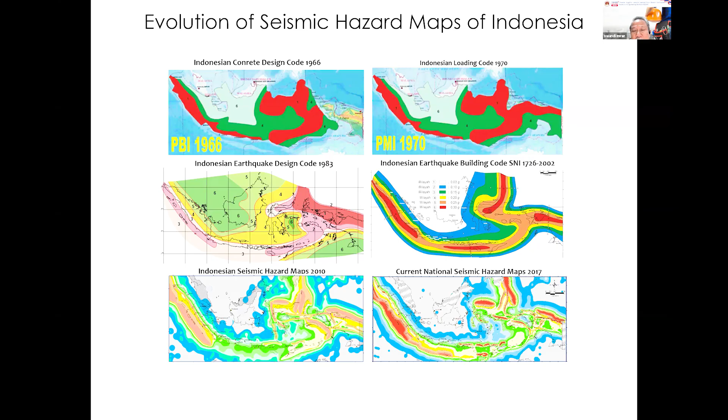Pak Wayan also mentioned continuing to update the seismic hazard map. This is the evolution of the seismic hazard map of Indonesia, started from 1966, and the current one is 2017. But now we are in the process, at the final stage, to issue the updated seismic hazard map of 2024. So every time it's updated, the number of active fault lines being considered keeps increasing. This is because we have more data available, so that's why it's considered in the development of the updated seismic hazard map. In 2010, we had only 81 active fault lines. In 2017, 295, more than 3 times more. And then in 2024, 402 active fault lines.

Now, with this increase in the number of fault lines to be considered, of course there will be an increase in the seismic hazard level that we have to consider for the seismic hazard map. And every time we have that kind of situation, our concern is the existing buildings. There are always some vulnerabilities already present in existing buildings. At least the base shear capacity of buildings, especially those designed based on older seismic codes, is much lower than those designed based on the current code.

The existing seismic detailing may not be adequate for areas with increased seismicity, especially to anticipate the unexpected. I think this also supports what the previous presenter mentioned about the importance of detailing. The seismic detailing is actually based on the seismic design category, which is based on the acceleration in the area. Once the acceleration increases, the seismic design category will also increase, and as a result, the detailing requirement will also increase. Now that's going to be a concern for old or existing buildings.

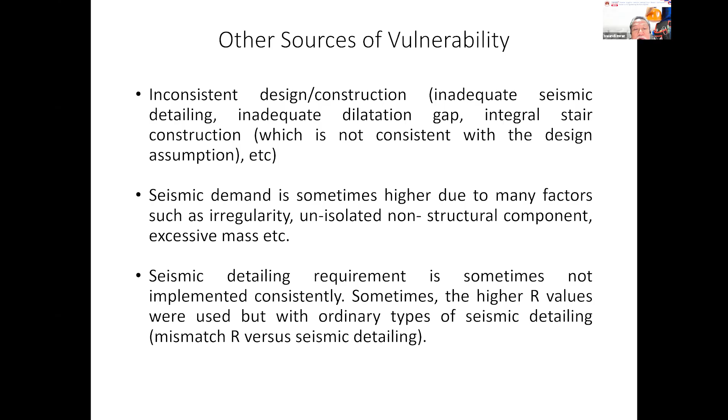Now, because of this concern, existing buildings need to be evaluated seismically. The purpose, of course, is to mitigate the risk of collapse of existing buildings due to earthquakes, especially those designed based on older codes.

In Indonesia, it is also related to the requirement for function worthiness certificate, or SLF, of building structures. It is actually mentioned in the regulation of our government. Recently, our government issued this SNI, Indonesian National Standard, for seismic evaluation and retrofit of existing buildings. This code is actually basically a performance-based code. So even though the structure has some deficiency, as long as the performance can meet the requirement, then it is fine. If it cannot meet the requirement, then of course you have to do some retrofitting.

The next one is regular updating of relevant codes and standards. Our seismic code for building design actually comprises a code for determining seismic load demand, which we call SNI 1726. We adopt the ASCE 7. I think similar to what the presenter before mentioned, that in Bangkok, Thailand, they also use ASCE 7 as the reference for their seismic codes. So it's the same in our case.

And then for the detailing, the second code needed for the design, we follow the AISC, same as mentioned for Myanmar, for steel structures, and then ACI 318 for concrete. So as long as we implement these two codes consistently, then of course, I agree with the previous presenter, we will get a building that can survive the earthquake. This is just information on the codes that we have.

The next one is applying state-of-the-art technology to reduce seismic demand. This can be implemented for existing buildings and also for new buildings. But so far in Indonesia, we only apply it to new buildings. Some of them actually existing buildings as well, but so far, as far as I remember, only one existing building has been retrofitted using anti-seismic technology, or anti-seismic devices.

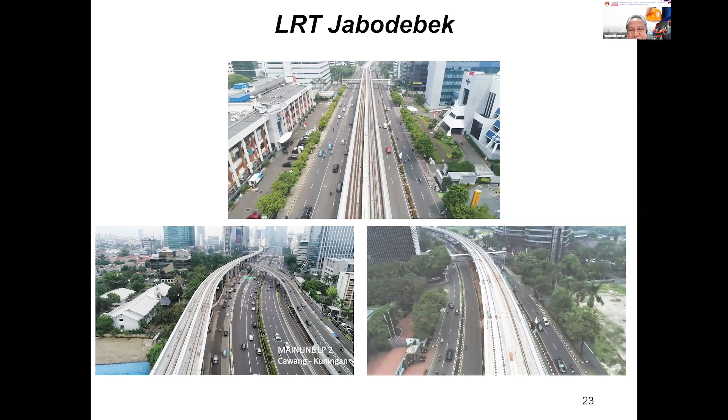The next one is implementation of government regulation to control building permits. I guess Prof. Sengara already mentioned this. We have what we call the building advisory committee for high-rise buildings, so all designs have to go through this review process in this committee.

We also have a bridge safety committee. I think Prof. Sengara didn't mention about this. Our government also set up a bridge safety committee with a similar role, expected during construction and also design, to make sure all the design process is already according to the standards or codes that we have.

The last one, our government also has a program to develop risk maps for all cities and regencies in Indonesia.

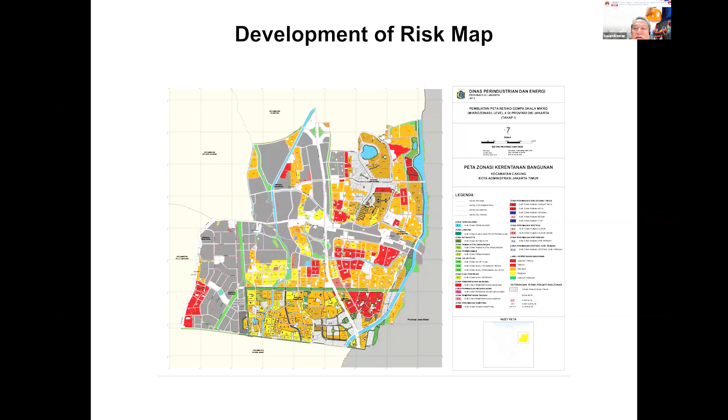Like the one shown here, this is the seismic risk map of some parts of Jakarta: one in Cakung district and the other in Duren Sawit district. Based on this, we can know the risk of the buildings or housing in the area.

I think that's all that I want to present. Thank you.

I cannot hear your sound, your voice. Okay, fix it now. Okay, can you hear me now? Yes, okay, thank you very much for your presentation.

You have added to this topic very well, because you mentioned the infrastructure project which recently became an issue in Thailand, where only one building collapsed. But anyway, there were so many other buildings and infrastructure damaged as well. So this is something we have to learn from Indonesia, since you have so much more experience than us.

So my question to you may be, in the case of Indonesia, I'm sure you have been going through this kind of issue in your country. How frequently do you need to modify your design code in terms of accommodating seismic resistance? Is there any major change from the history? Any statistics about it?

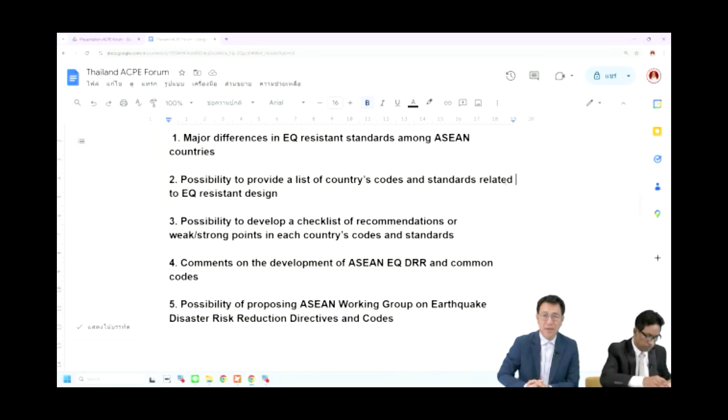Not only the research, but also the earthquakes themselves—earthquakes originating from places that had not been recognized before. This occurred many times, like the one in 2022 in Cianjur. We never expected the epicenter of that earthquake to be in that location; it had not been recognized before. That's why the number of fault lines keeps increasing.

In the 2010 seismic hazard map, we only had around 81 fault lines, but then in 2017 it went up to 295. Yes, that's for the active fault lines. And the recent one, currently in the final stage of process, probably within this year will be issued—the new seismic hazard map of Indonesia 2024, with a total of around 402 active fault lines.

And now, every time we get a new seismic hazard map, we have to modify our code, our respective standard, because this map will be accommodated in the seismic standard later on.

Very interesting information, because we all know that earthquakes are an act of God, right? But it looks like nobody can really forecast or foresee them accurately. As you mentioned, many times it happens in areas we never recognized before. So even a country like Thailand still needs to be vigilant about what could happen with this kind of disaster. Okay, thank you for your information.

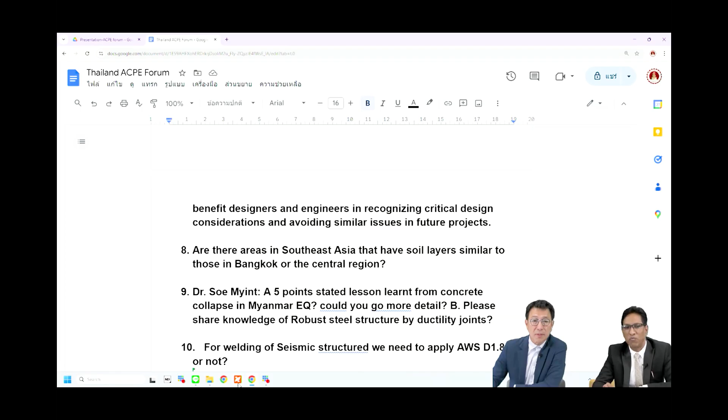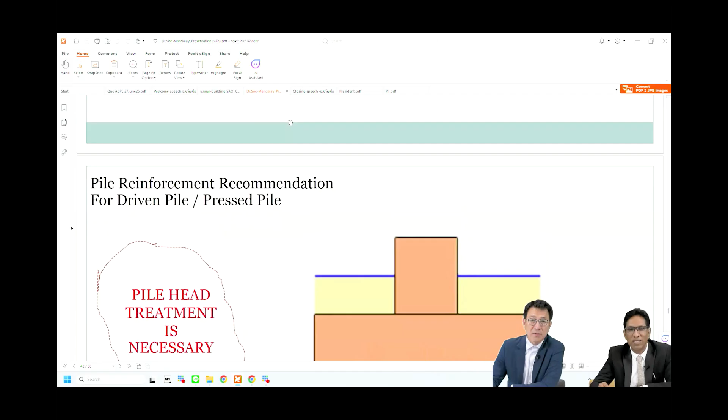Can you show me the slide again? The 5-point lesson learned, under the concrete section. Go up. No, down, scroll down. One more slide. Okay, is this the one? Leave it here.

This is about the need for skilled professionals. For ductile connections, the standard spacing has to be exactly horizontal or vertical. To check all these things, we need skilled professionals to stand by during construction. Otherwise, if he goes outside while workers are doing concreting, he has no chance to inspect it. That's why we need skilled professionals.

Retrofitting and maintenance - you have to check all existing buildings, which is required to correct deficiencies in seismic design. You need to make retrofitting and maintenance accordingly after running structural analysis like ETABS.